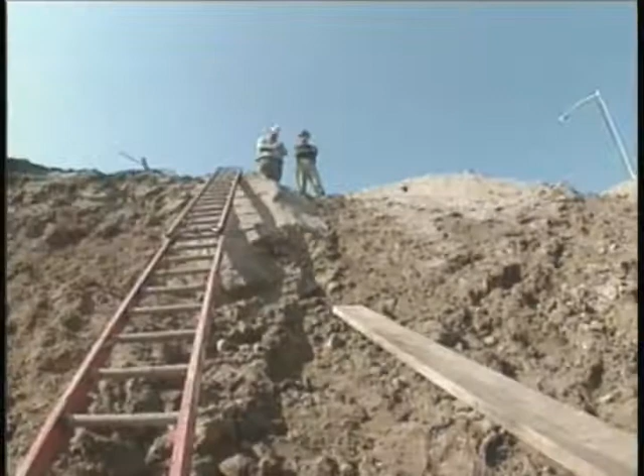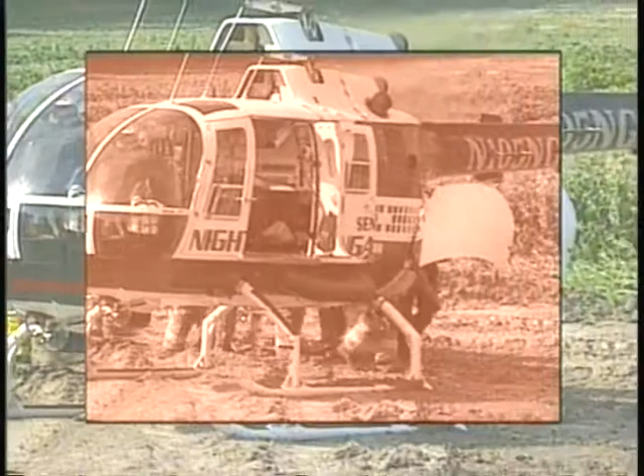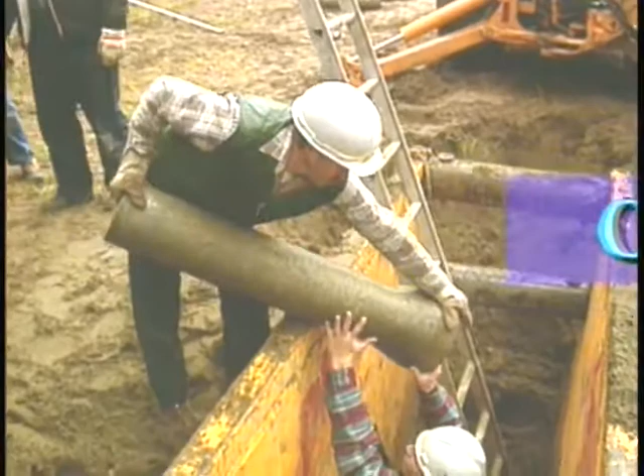Unsafe excavations kill people. Every year, about 400 U.S. workers die in trenches, and 6,400 are seriously injured doing the work we do every day. That's why you need to understand trench hazards and how to prevent cave-ins. OSHA, the Occupational Safety and Health Administration, has a standard on safe trench procedures to protect you on the job. This program is going to teach you how to classify soil, work in protective systems, and spot excavation hazards.

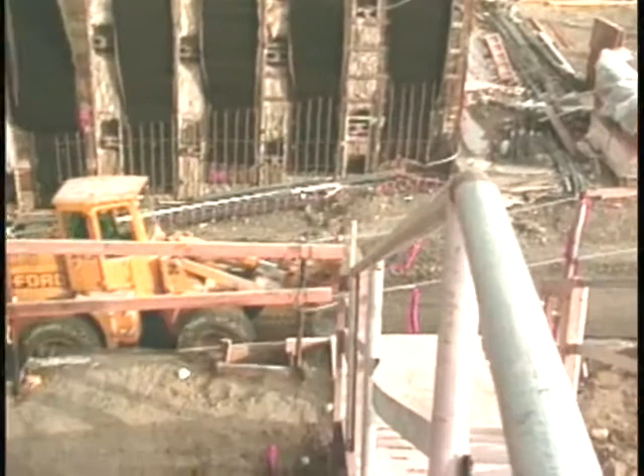First, what is a trench? It's an excavation deeper than it is wide, but no more than 15 feet wide at the bottom. An excavation can be wide, like a block of high-rise basement, or one-sided, like a borrow pit. What all excavations have in common is the potential to kill. You see, when we excavate, we know the walls will fail. We just don't know when.

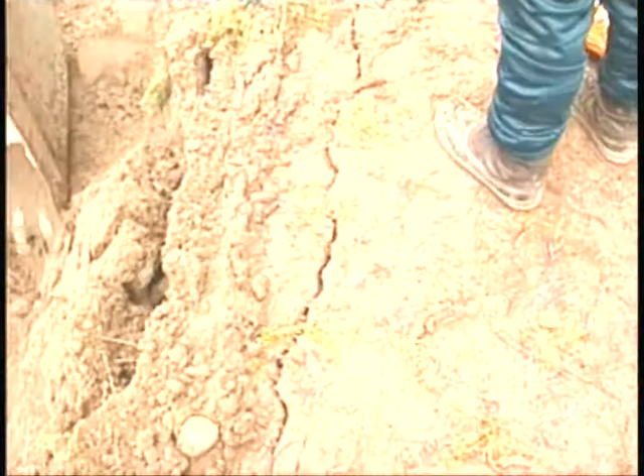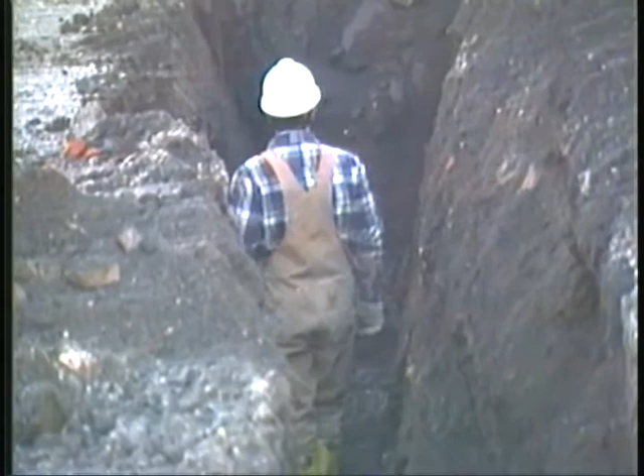In its natural state, soil stays in place, pulled by horizontal and vertical forces. Excavate, and you've disturbed nature. Soil moves downward and inward to heal itself. When soil starts to cave in, cracks cause the bottom third to fall first. If you are working when the walls fail, you can be buried up to your knees before you know it. And if you're buried up to your knees, you can't get out without help.

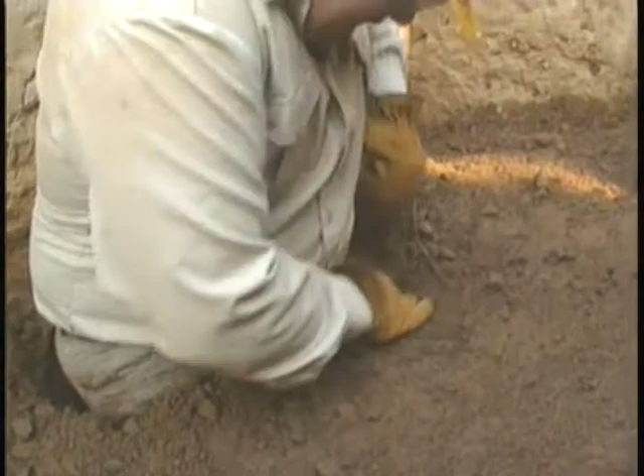You see, soil is heavy. An average cubic foot of soil weighs 100 to 125 pounds. Some soils weigh up to 145 pounds. With the suction effect, pulling out one buried worker's foot can take 750 pounds of force. Your body's just not built for that. Or suppose you're buried to your chin. Your chest must move 800 pounds of force to get air in and out of your lungs. What happens is suffocation. Your chest can't move in or out, so even if the dirt doesn't get in your mouth or your lungs, you'll die when you can't breathe.

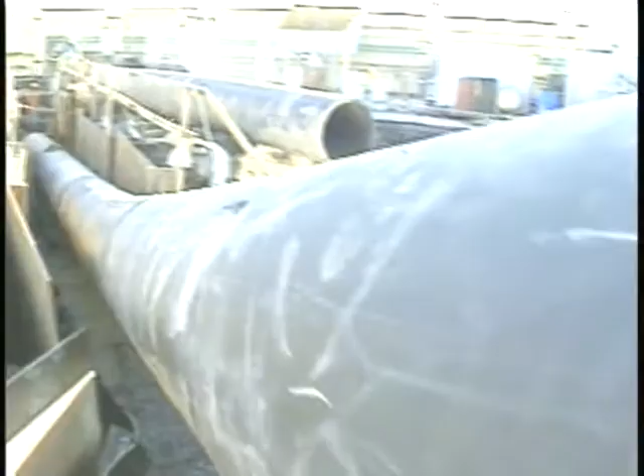There are other ways workers can be killed in excavations. Objects fall in on them. They drown. They're crushed and suffer massive internal injuries. To keep you safe in excavations, OSHA requires soil classification by a competent person and installation of adequate protective systems before you enter the trench. A competent person has enough training to identify excavation hazards and authority to take prompt corrective action.

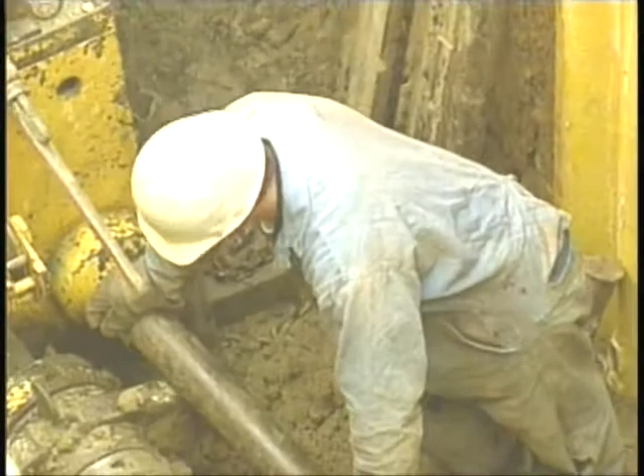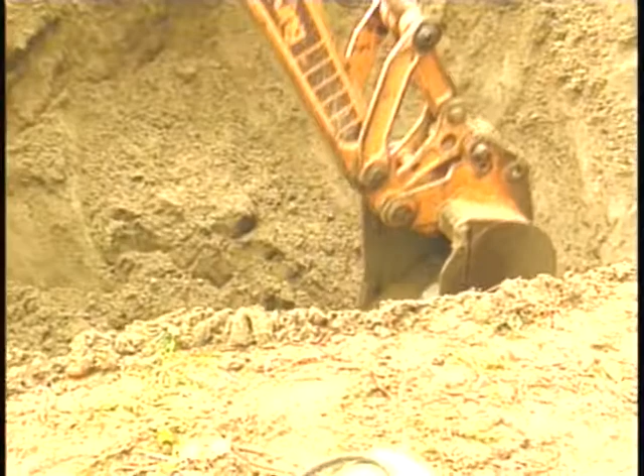The type of soil determines the selection of safety system. OSHA identifies soil types as stable rock, A, B, or C. In practice, you never work in stable rock, since excavating makes soil unstable. Type A is the most stable class of soil. It is dense, heavy, and resists penetration. If it dries out, it will develop cracks. Clay, silty clay, and hardpan are examples of Type A soils.

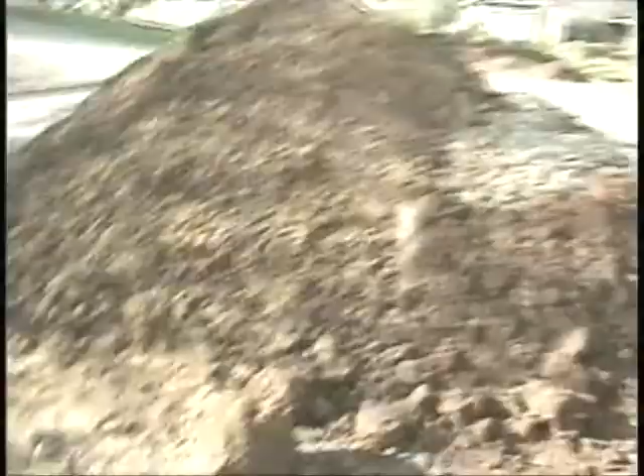Type B is the next most stable and is made up of soils like silt, sandy loam, medium clay, and unstable dry rock. Type C soil is the least stable. Gravel, loamy sand, soft clay, submerged soil, or unstable rock are all examples of Type C material. Actual classification requires a competent person to identify grain size, saturation, cohesiveness, and unconfined compressive strength.

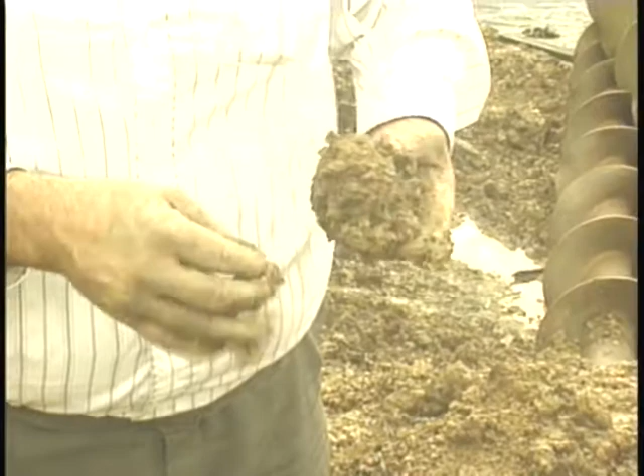Soil falls into 4 basic grain sizes: gravel, sand, silt, and clay. Gravel is the least stable, and clay is the most stable. Basically, if a grain of soil is larger than a pencil lead, it's gravel. Smaller is sand, and your naked eye can't see particles of clay and silt. In general, the bigger the grains, the less stable the soil, and the more careful you need to be.

When you're dealing with water and clay or silt, a certain amount of water makes the soil stable, but too much water causes cave-ins. So along with grain size, the amount of water in the soil must be considered.

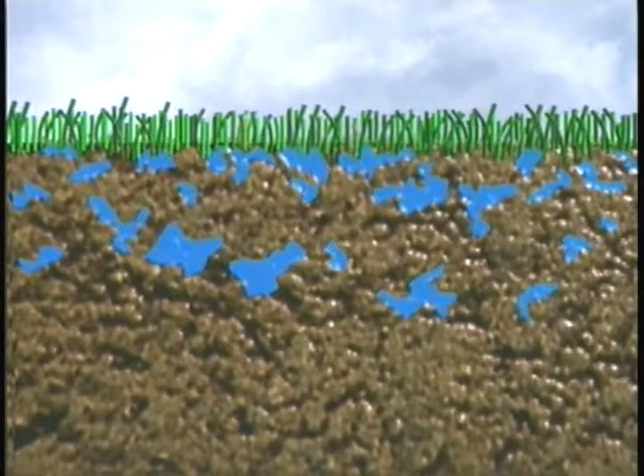Soil is made up of rock broken into tiny grains separated by voids. Soil voids fill with water or air. Saturation refers to how much water is in the voids. If the voids are completely filled with water, we say the soil is saturated. If the voids are completely filled with air, we say the soil is oven dry.

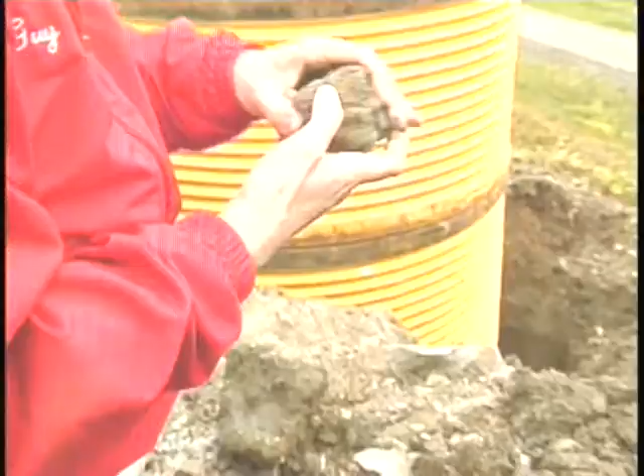This dried out soil fissures and spalls off the sides of the excavation. Anything in between dry and saturated is referred to by the percent of saturation. Keep in mind, the more saturated the soil, the less stable it is, since soil slumps and shears off faster when it's full of water. That's why we look at the stability of soil, or its cohesion.

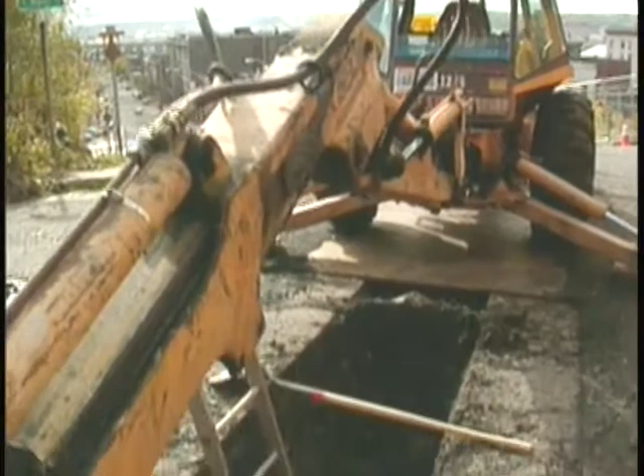Soil stability refers to how well grains hold together and is called cohesion. Cohesion predicts how well the walls of a trench will hold together, or how quickly they'll collapse if unsupported. Unconfined compressive strength refers to how soil reacts under pressure. Soils that readily shear off trench walls are more hazardous than those that hang by tensile strength. Unconfined compressive strength is measured as the amount of weight per square foot required to collapse a sample.

Soil is tested visually and manually by a competent person. With experience, you can recognize some visual clues. As you come on the site, look at soil particle size. Remember, if it's larger than pencil lead, it's gravel. Gravel can be Type B or C. Angular gravel is Type B, and round gravel is Type C. If the soil particle is the size of a pencil lead, it's sand and Type C.

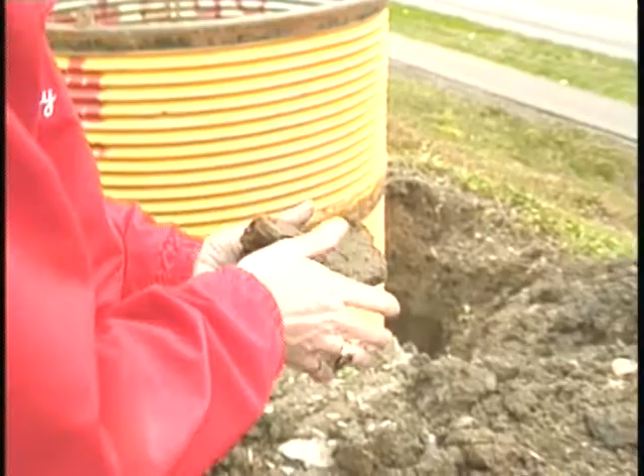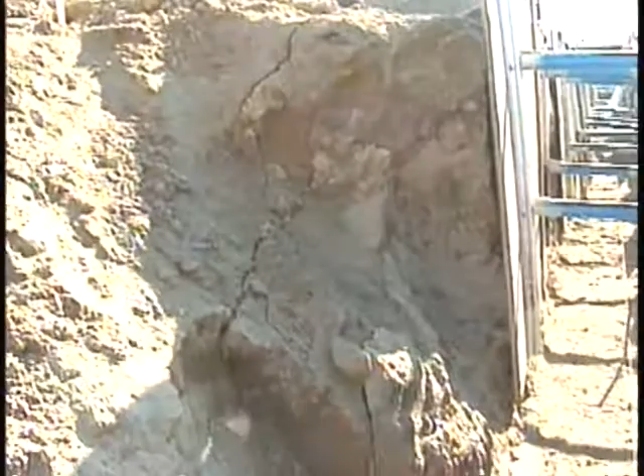If particles are invisible, the soil can be silt and clay, which could be classified Type A, B, or C. But remember, no natural soil is made up of all one-size grain, so you'll be working in mixtures. Next, notice if the soil clumps when it's dug. This may indicate it's clay and silt. Cracks in walls and spalling can mean the soil is Type B or C.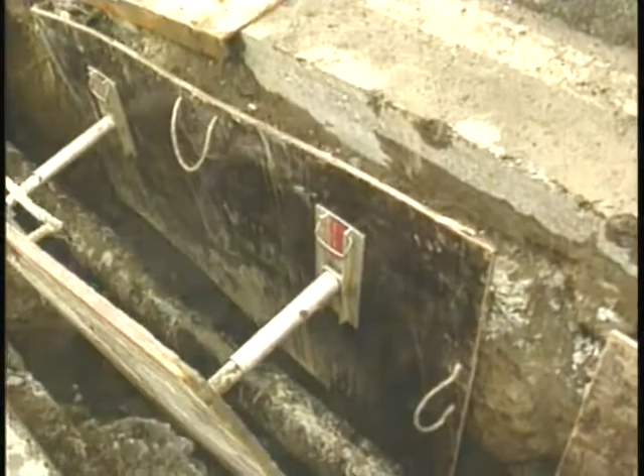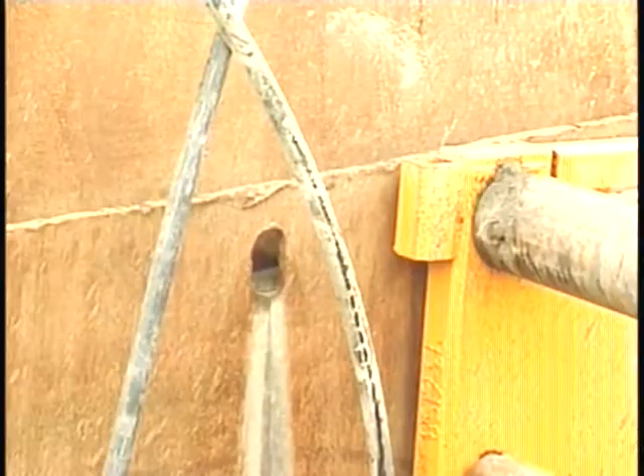Layered systems and adjacent hazardous areas such as buildings, roads, and vibrating machinery require special consideration and possibly the services of a registered professional engineer to determine soil type. Water standing in the bottom of the trench or seeping through walls automatically makes the soil Type C. You now have a rough idea of soil type, but manual tests are required before protection is selected.

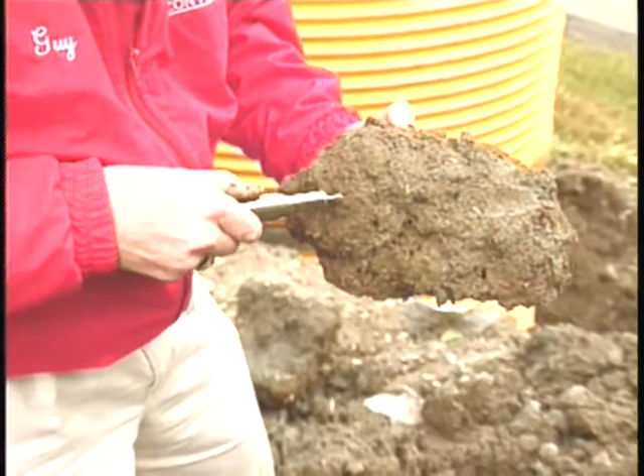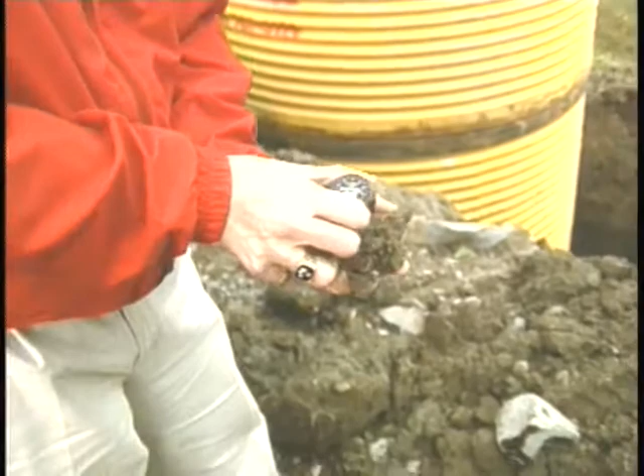Sometimes soil samples are sent to a lab for testing. Sometimes they're tested on site. Whatever method is used, soil is always tested as soon as possible once the sample is removed from the ground to preserve its natural moisture. One warning: testers never enter any excavation to test soil. Soil is first dug out and a representative sample is gathered from the spoil pile.

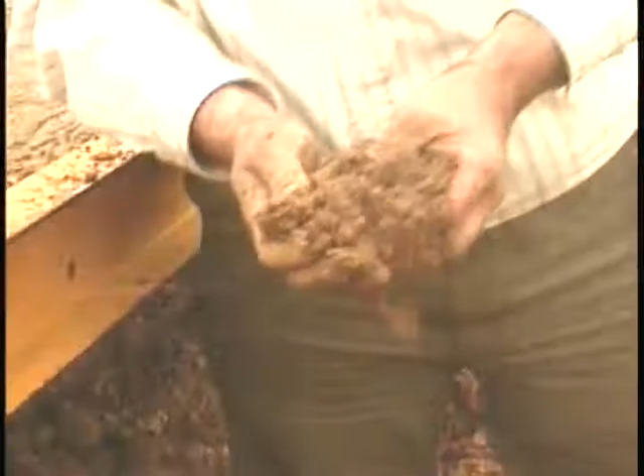Tests include a sedimentation test that shows how much silt and clay is found in sandy materials. For this test, a sandy soil sample, after removing gravel, is placed in a straight-sided jar with about 5 inches of water. The sample is thoroughly mixed and allowed to settle. Sand settles off in 30 seconds, and a sample with 80% sand will be classified Type C.

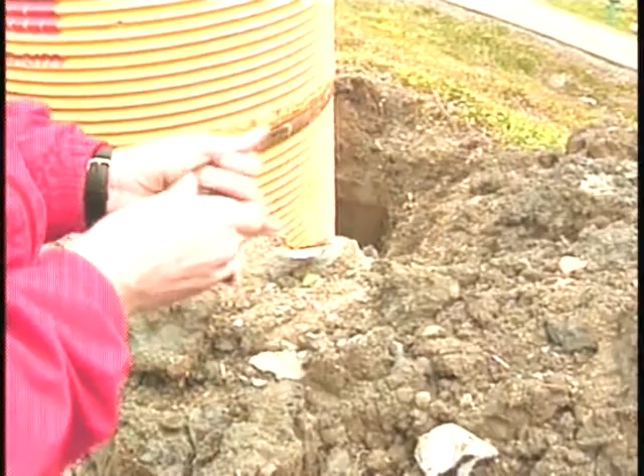The wet shaking test identifies the permeability of the soil. You can see as the sample is shaken, clay resists water movement through it, while water flows freely through sand and less freely through silt. The thread test is used to determine cohesion. For this test, a disturbed sample is rolled out to 1/8 inch diameter and picked up. If a sample holds together for 2 inches, it's considered cohesive. Clay and silt behave similarly until picked up. Silt breaks off before clay does.

A ribbon test is a backup for the thread test, since it is unlikely to be affected by one stray piece of gravel. A sample is rolled to 3/4 of an inch in diameter and squeezed between thumb and forefinger into a flat, unbroken ribbon 1/8 to 1/4 inch thick. As it is formed, the ribbon is allowed to fall freely. If the ribbon does not break before several inches are squeezed out, the soil is considered cohesive.

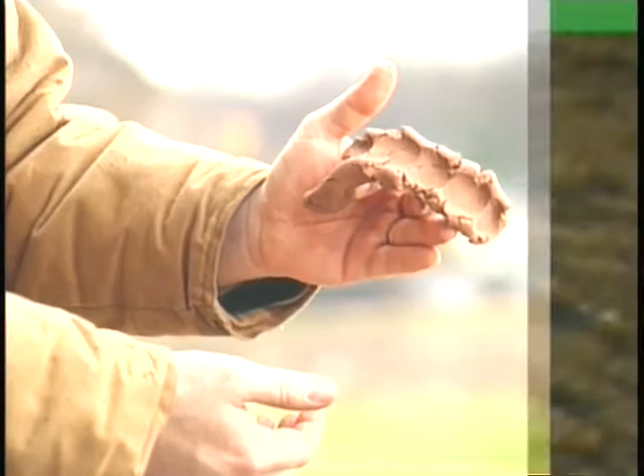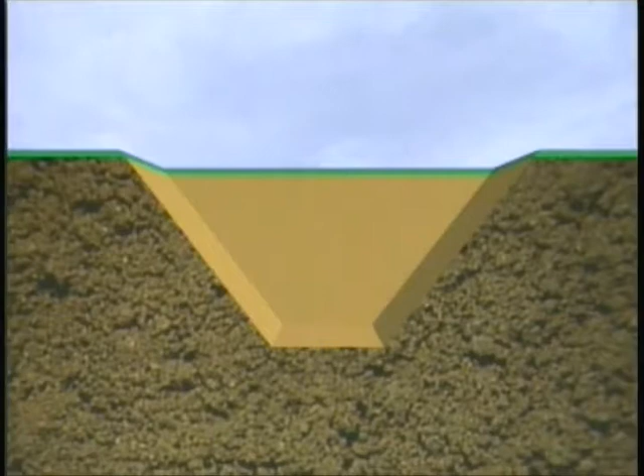When soil type is known, the right protective system is chosen. Basically, employers may choose from sloping and benching or shoring and shielding. Sloping and benching cut the walls of an excavation back at an angle to its floor. The sides of a sloped system are angled cuts, while benching uses one or more steps. The flatter the angle, the greater the protection.

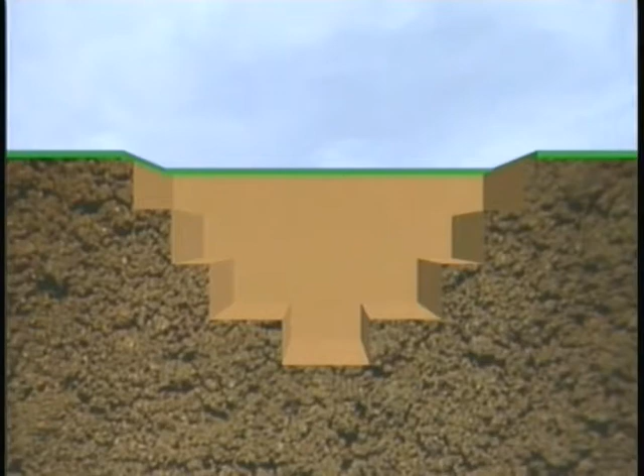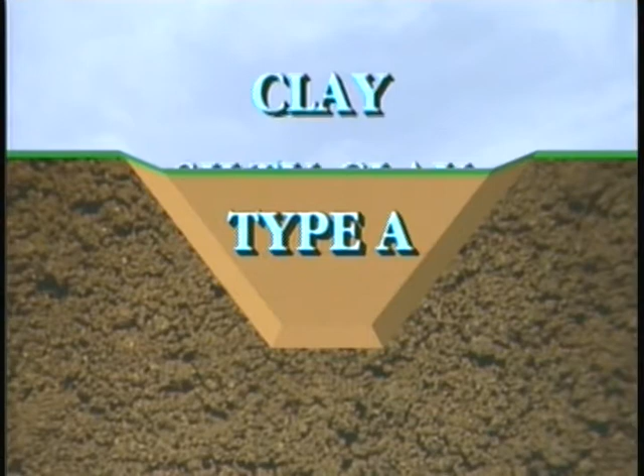The choice of a slope or support system is based on soil classification and the restrictions of the particular excavation site. Type A is the most stable class of soil and holds together when wet. Clay, silty clay, and hardpan are examples of Type A soils. The ratio of slope established for Type A soil is 3/4 to 1. To determine the slope of a 20-foot trench, start at the trench floor. For every vertical foot rise, the wall of the trench must be cut back 3/4 of a foot.

The benching system for Type A soil, with a 3/4 to 1 ratio, will have steps 4 feet horizontal and 5 feet vertical. This forms a step system that can be repeated to the top of the excavation.

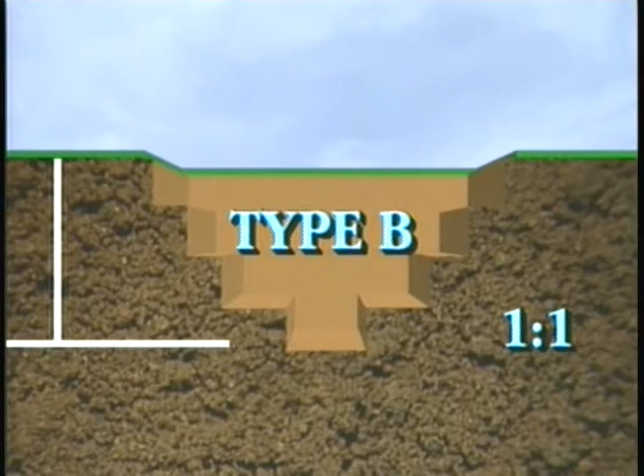Type B, the next most stable, is made up of soils like silt and sandy loam, medium clay, and unstable dry rock. The ratio of slope for this soil is 1 to 1. Every horizontal foot run must have a vertical foot. Benching in Type B soil at the 1 to 1 ratio means that each step will have a 4-foot horizontal run and a 4-foot vertical rise. This will form a multiple bench system of protection. Only cohesive Type B soils may be benched.

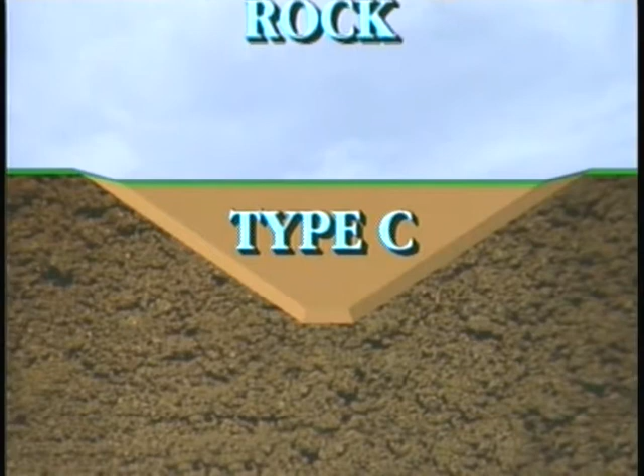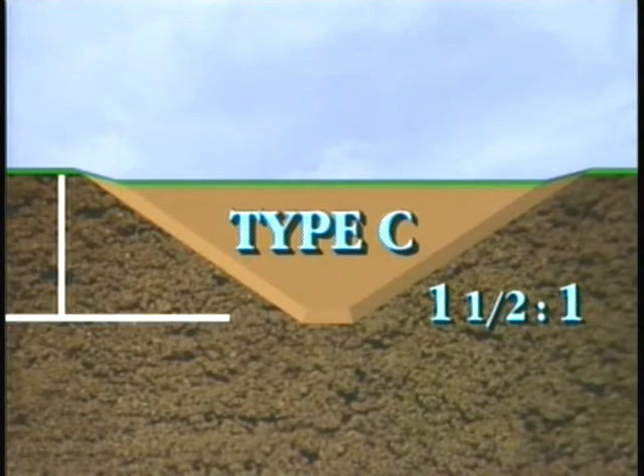Type C soil is the least stable. It is made up of gravel, loamy sand, submerged soil, or unstable rock. Type C soil needs the flattest angle of slope. With a ratio of 1.5 to 1, the wall of the trench must be cut back 1.5 feet for every vertical foot rise. Due to soil instability, Type C soil is not benched.

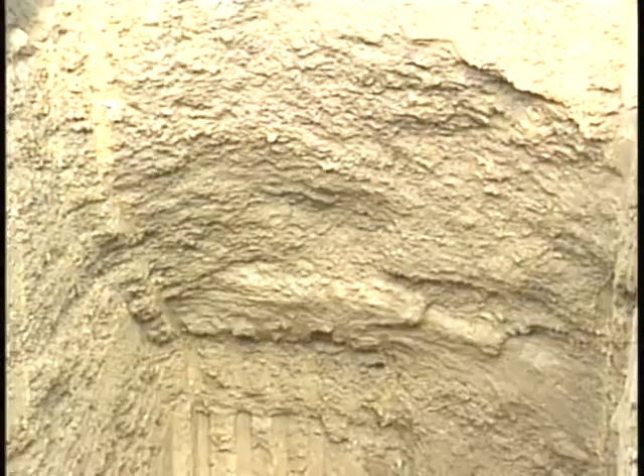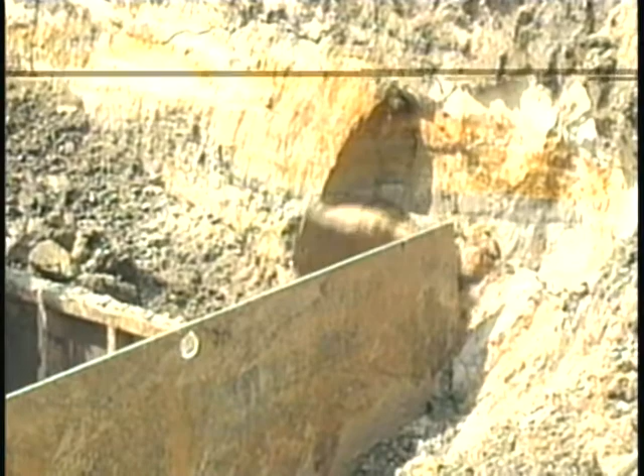Sloping and benching diagrams are based on good trenching conditions. Factors like weather, traffic vibrations, and pressure from nearby loads, called surcharge, make soil less stable. A sloped or benched excavation should be re-inspected for signs of distress after any increase in such disturbances. Cracking in excavation walls, bulging of material from its bottom, or separation of small clumps from its sides can indicate a potential cave-in. You will be directed to leave the hazardous area, and the slope will be cut back farther.

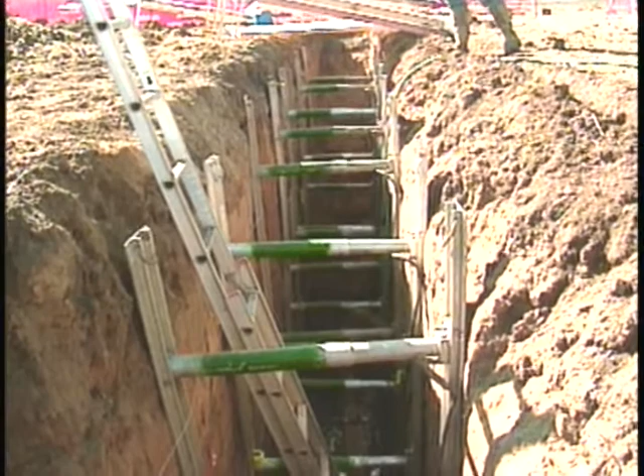Shoring is designed to prevent cave-ins by supporting walls with vertical shores called uprights. Horizontal members along the sides are wales, and those placed horizontally between trench walls are cross braces. Sheeting is another name for uprights. Butted together, these members are called close sheeting.

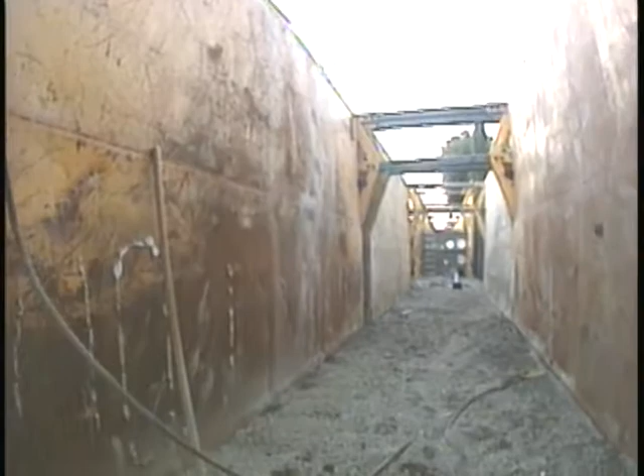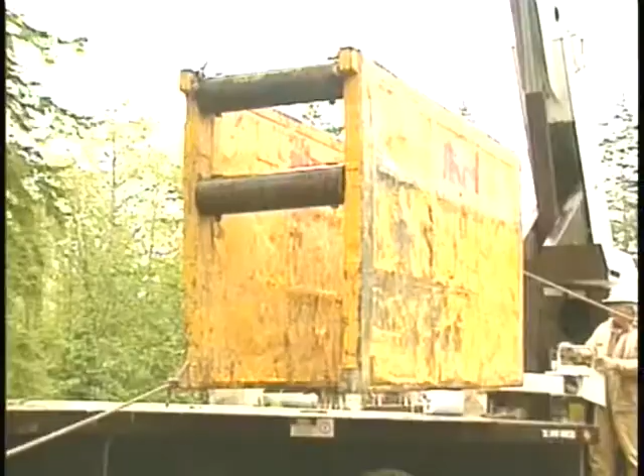Shielding is designed to give employees a safe work area by protecting them from collapsing material. Shielding can be either pre-manufactured or job-built under the specifications of a registered professional engineer. Shields used in trenches are called trench boxes or trench shields. These are usually portable steel structures placed in the trench by heavy equipment. In deep excavations, trench boxes can be stacked and attached to each other with stacking lugs.

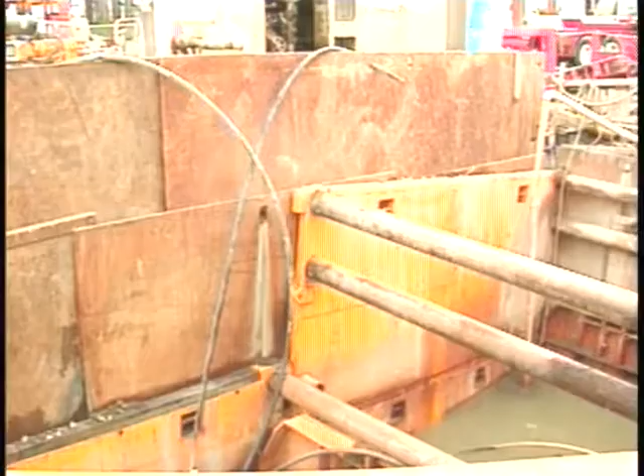Using steel sheeting to extend the height of a trench box is unsafe because it overstresses the box. The professional engineer who designed the box is not responsible for its safety if the system is misused. Shields are installed in a way that restricts side-to-side and other hazardous movement. No one is allowed in the shield while it is being raised or lowered into place.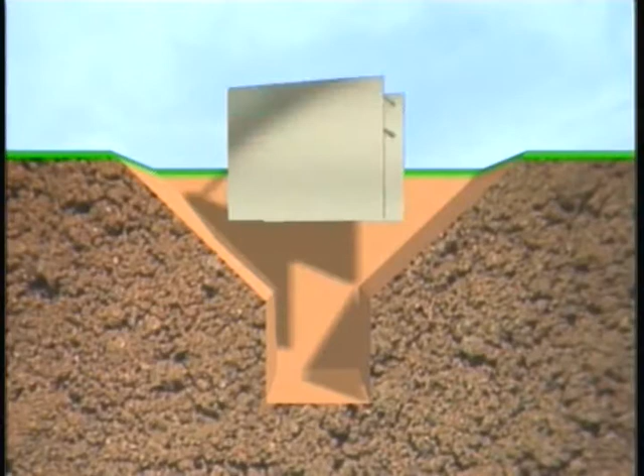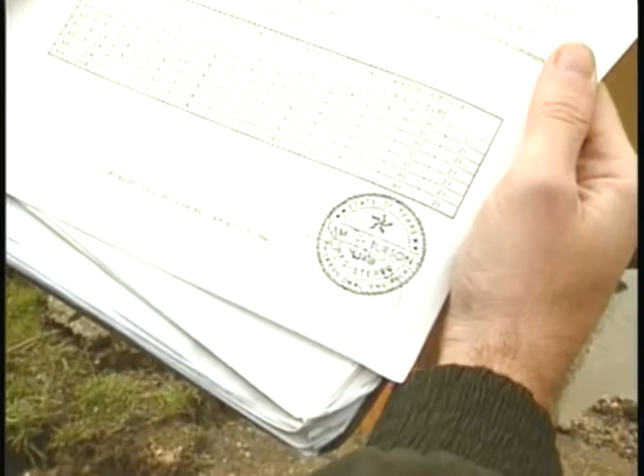Shielding or sheeting used with sloping must extend at least 18 inches above the bottom of the sloped part of the excavation. When using shores or shields, tabulated data provided by the manufacturer or a professional engineer must be followed regardless of soil classification. Any deviation must be approved in writing by the manufacturer. Installation and removal of a support system are safest when done from outside the trench. Individual shores are installed and released slowly to prevent failure of the remaining protection. Excavations must be backfilled immediately after support systems are removed.

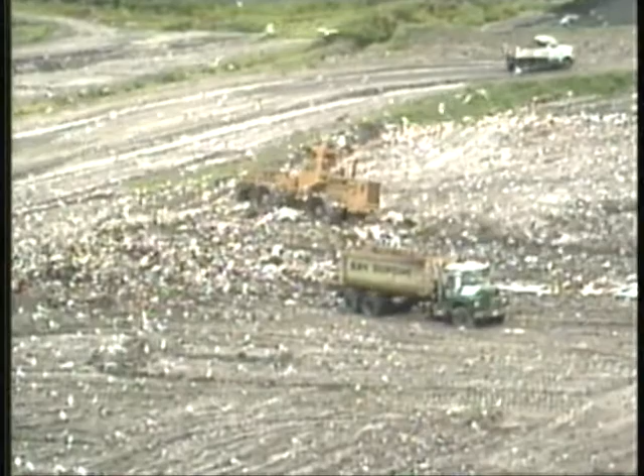Occasionally, an excavation is subject to hazardous atmosphere. This can occur when digging near a landfill, in a sewer, or other toxic site. Air will be tested to ensure that it is made up of at least 19.5% oxygen and not more than 23.5% oxygen. Explosive, flammable, poisonous, corrosive, oxidizing, irritating, oxygen deficient, toxic, or otherwise harmful atmosphere will be tested and controlled before you enter the trench. Ventilation and use of personal protective equipment are two means of controlling hazardous trench air for your safety.

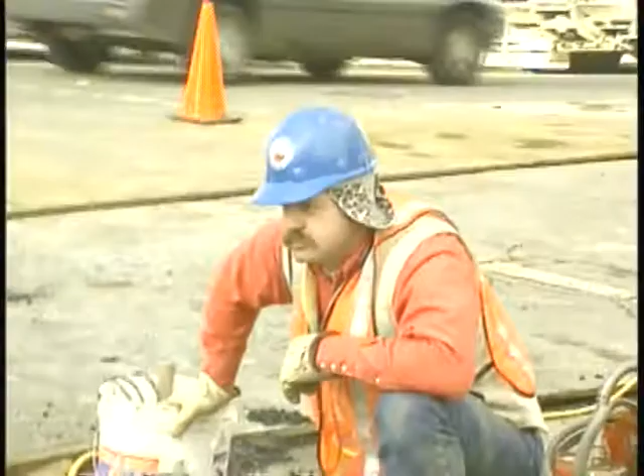Underground utilities are located and marked by the appropriate gas, electric, or other company before excavation starts. Excavated material and other objects must be kept at least 2 feet from the opening. No one works on the sides of sloped or benched excavations above other employees unless the lower worker is protected from falling material. No one is allowed underneath loads handled by lifting or digging equipment. No one except the operator is to be close to a vehicle being loaded or unloaded.

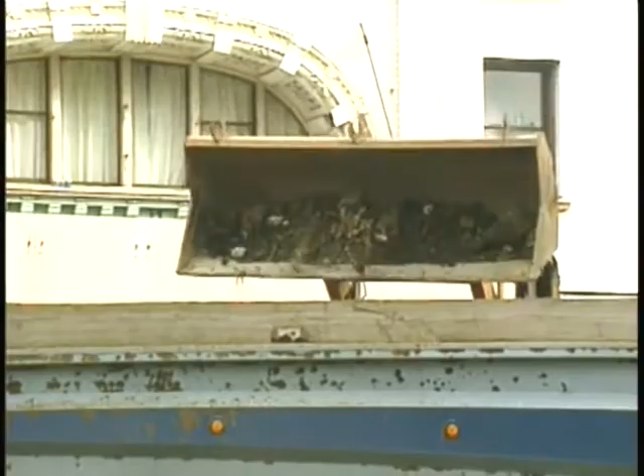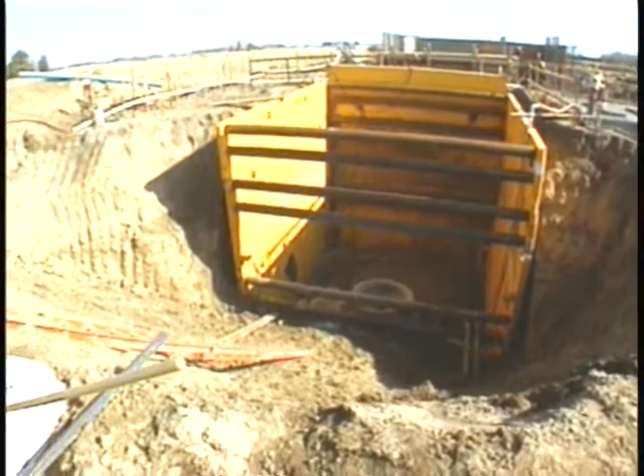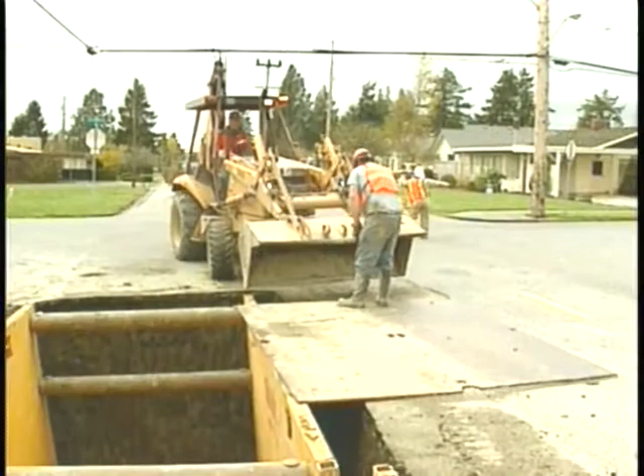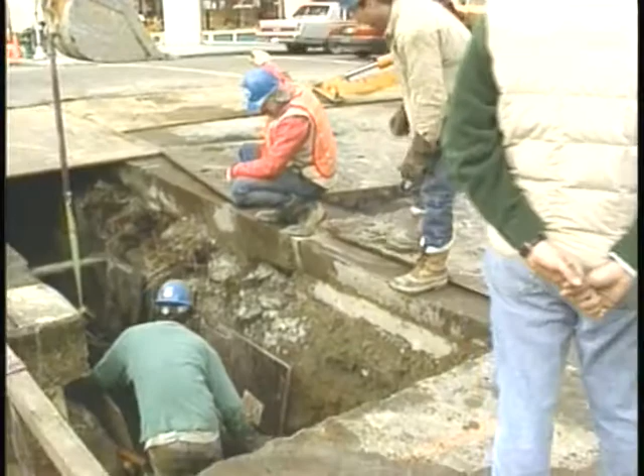Barricade tape draws attention to the work zone, but does not serve as a physical barrier to keep people and vehicles out. Trenches 4 feet deep or more must have a safe means of exit, such as a ramp or ladder, within 25 feet of every worker. Hard hats are required in any work zone, and vests are required when working in a street. Any excavating under the base or footing of a foundation or wall requires a support system designed by a registered professional engineer. A top person who observes trench work from outside the excavation can detect moving ground and warn workers to leave the trench until hazards are controlled.

Before you go to work in an excavation, know what you're getting into. It can be done safely if you know about soil classification, protective systems, and conditions that can weaken the protection. It's up to you to work safe.